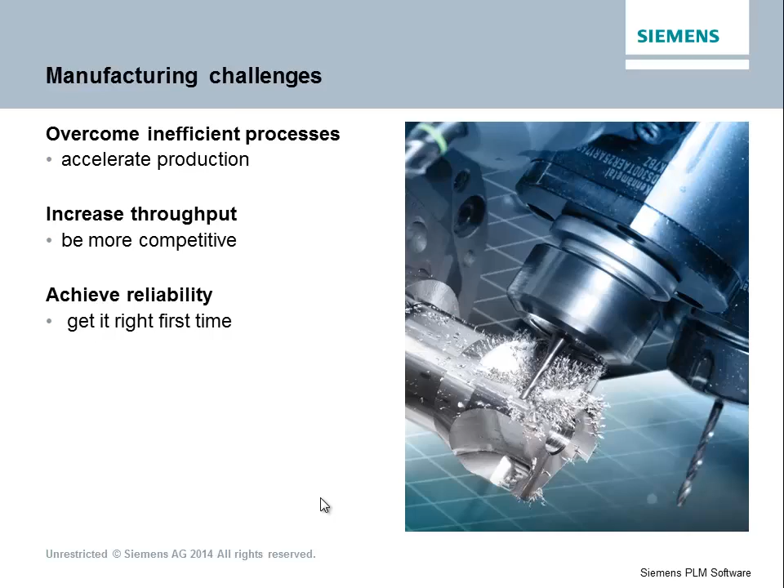The Siemens Advantages: a model-driven process that's maximizing the value of a unified system with innovative technology for greater productivity through automation, and having solution confidence to support your business with a proven system.

Now let's look at the model-driven process with NX. In NX, we call this the master model. Master model enables users to have a single model that's used for all downstream processes, from drafting, tool design, and assemblies to NC, CNC programming, and more.

Product manufacturing information, PMI, drives automation of the programming of inspection and documentation, along with CAM programming and feature recognition. Workflows are done in parallel and concurrently, thus reducing manufacturing engineering time. All users and consumers of this information are kept up to date, seeing the latest progress and changes in the work because of the full associativity in NX.

There is no need to manage multiple copies of design models or to use separate software for different work tasks. Engineering change orders are seamlessly handled. All documentation and programming is updated from the single driving master model. This factor alone saves time and money, eliminating issues like a part being programmed to the correct revision but rejected by inspection because their documentation was a revision behind.

Model preparation and job setup in NX. Here you can import or design your CAD model. NX reads all common CAD formats. We're going to select the CATIA V5 format. It's just a Windows file open, and here we'll see as we convert and load the part directly into NX, seeing the CATIA model. From here we're going to create a sketch plane and model the work holding and fixtures.

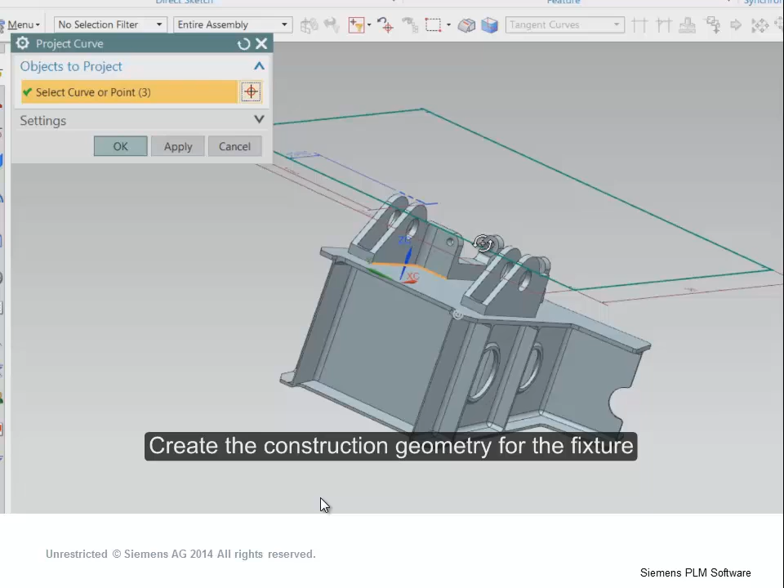We're creating the construction geometry that's used to build that fixture. We'll start with just a simple rectangle defining the outside border, or the footprint or pad, for the fixture. Again, with constraints and dimensions, you can size and shape the geometry as necessary. Here we're selecting the edges or features of the part that will be used to create the containment boundaries on the fixture.

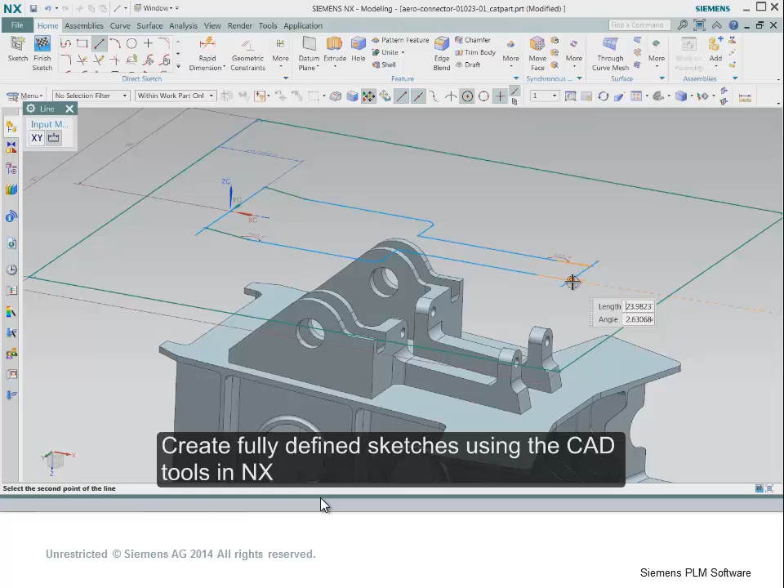This ensures that the fixture will always be associative to the part geometry. You can create fully defined sketches using the CAD tools in NX, as here we're adding additional geometry defining our design. You can create geometric rules that also assist in your design. Here we'll make all these lines parallel to the other sides of the fixture.

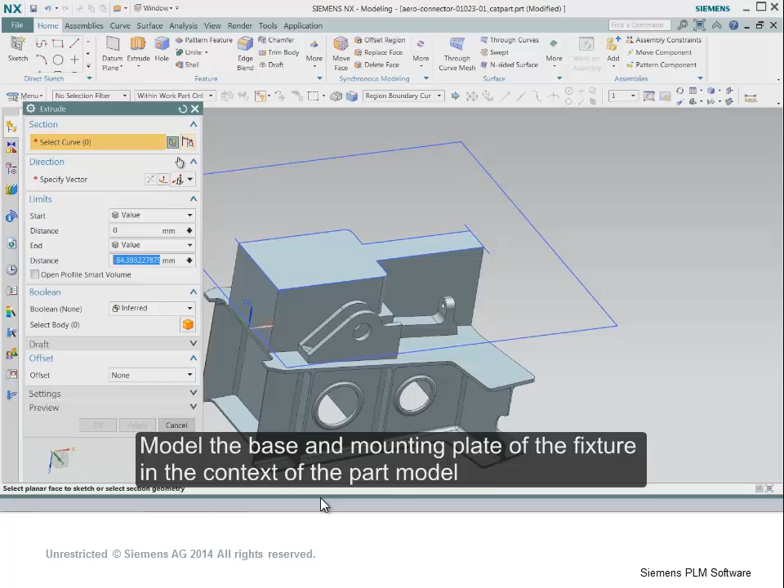Modeling the base and the mounting plate of the fixture is simple. It's just in the context of the part. We just select the part, and we'll select extrude, and we'll just pick a face onto the part. This would be the mating face where the fixture would align to the part. We'll then select the top area, creating the mounting plate for the part.

From here you could go ahead and add other fixture components to the part. Like here we'll add a bolt that would be used in our finished assembly fixture or our inspection fixture to do that. Again, you can add additional clamps and fixtures using assemblies and components.

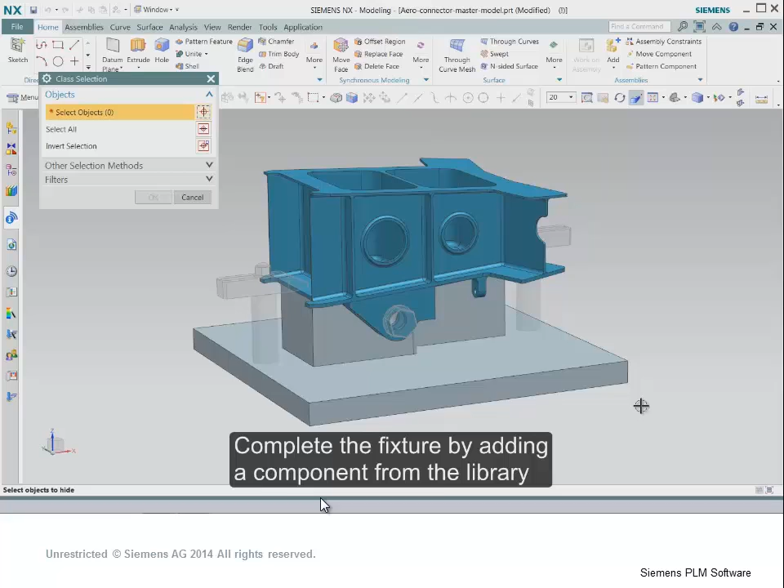So here we'll turn these off and continue on with our design using synchronous modeling to create the stock model for the manufacture of this part. Here we'll select the entire part and close all of the hole openings on the part.

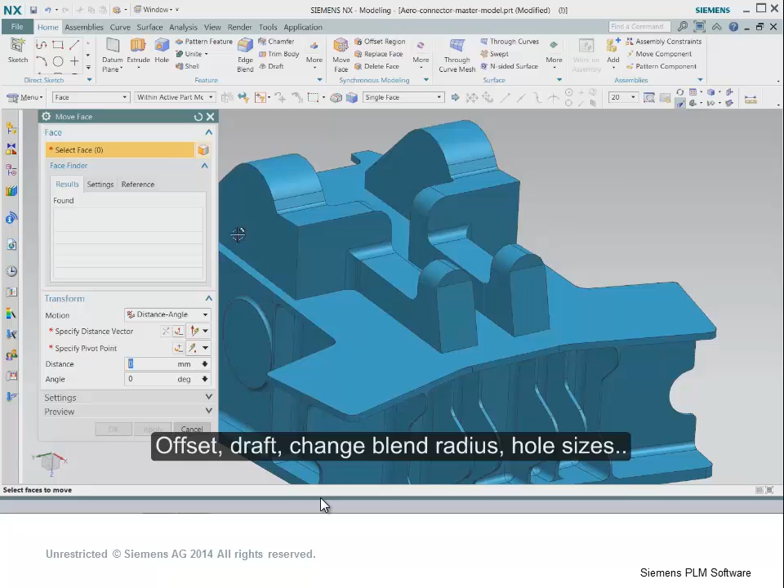We'll then offset different regions and boundaries of the part, representing what the casting stock would be from an investment cast part. Synchronous modeling can directly edit all the imported CAD model data. We'll add stock to the boss areas, change the blend radiuses on the part, remove some of the other features or de-feature the part, add draft angles, etc., and continue modeling the stock model of the part.

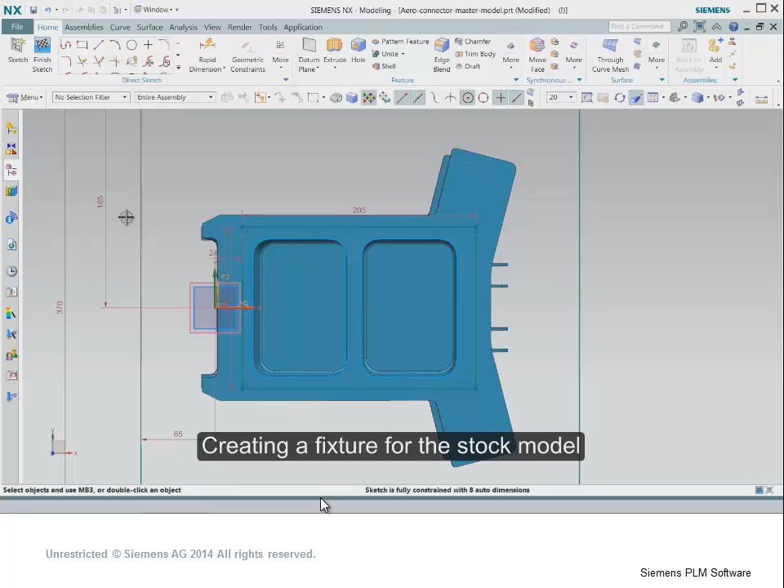Here we will continue modeling the second fixture for the part. Again, a similar operation as the first, we'll create our sketch for the part, defining the areas of the fixture we need to create. We'll select the edges of the geometry again to remain associative. There we select the geometry. You can see the ease of modeling inside of NX to create the fixture.

Here we will move some of the clamp components. You can again see the ease of the dynamic repositioning of components in NX.

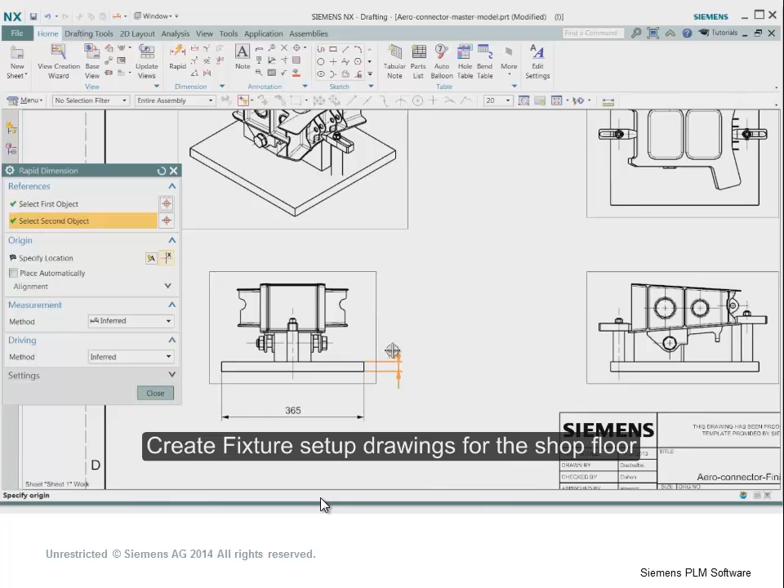From there we will create the fixture setup drawings for the shop floor. This becomes vitally important when jobs are created, to have this kind of documentation quickly, easily, and readily available associated to the part.

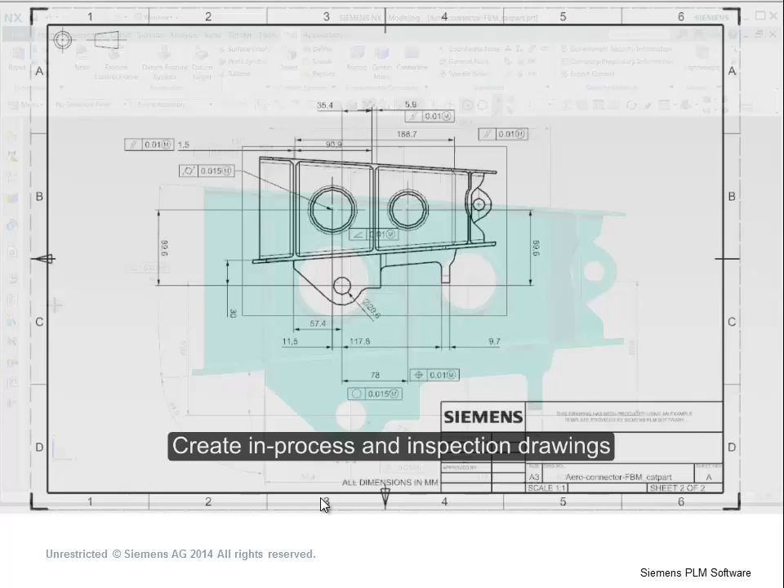Preparing product manufacturing information with PMI is easy, just by attaching the geometry the same as you would any sketches or dimensioning onto the part and creating the drawing, thus defining the product manufacturing information and feature control frames. Here we see the finished drawing being created for the inspection operations.

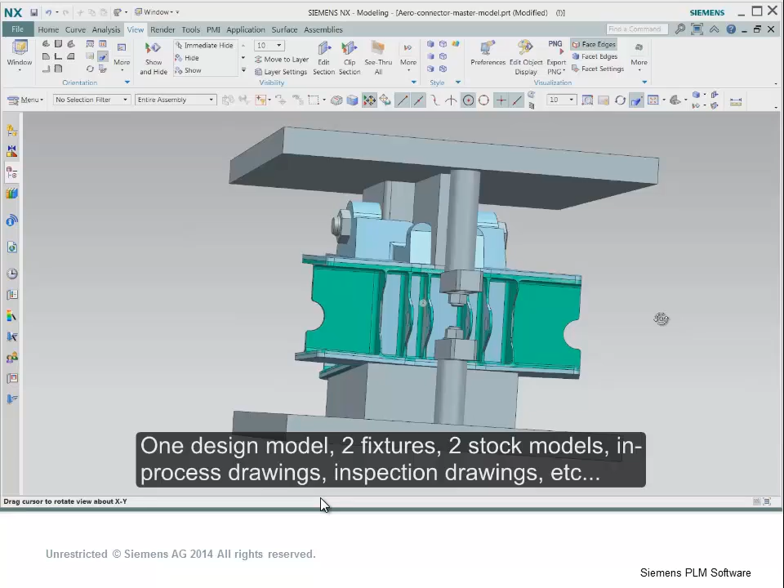There we move into, and you see a finished job preparation has been completed. One design model, two fixtures, two stock models, in-process drawings, inspection drawings, etc. Accelerate your production with NX.

We have just seen how NX is used to increase your manufacturing engineering throughput in the job setup and preparation tasks we all commonly use. Having the ability to create associative stage models and stock and casting models from customer-supplied design data ensures reliability and the confidence that you always have it right.

The inspection and quality department preparation and the fixture needs were handled, and the process documentation and drawings produced all concurrently from the one driving design source, enabling accuracy and communications throughout the entire job cycle. Let me tell you more about the master model workflow.

Let's move to the CAM and CMM programming tasks. Here the work that was done in the job prep and setup is used by the programmer and programming departments to apply the tool paths and our inspection paths. I'll show you this next.

Programming the setups and operations in NX.

Adding the part and the fixture to the CMM from our previous model preparation is fast and easy. Simply open the part and add it to the machine tool. Dynamically adjust the fixture components.

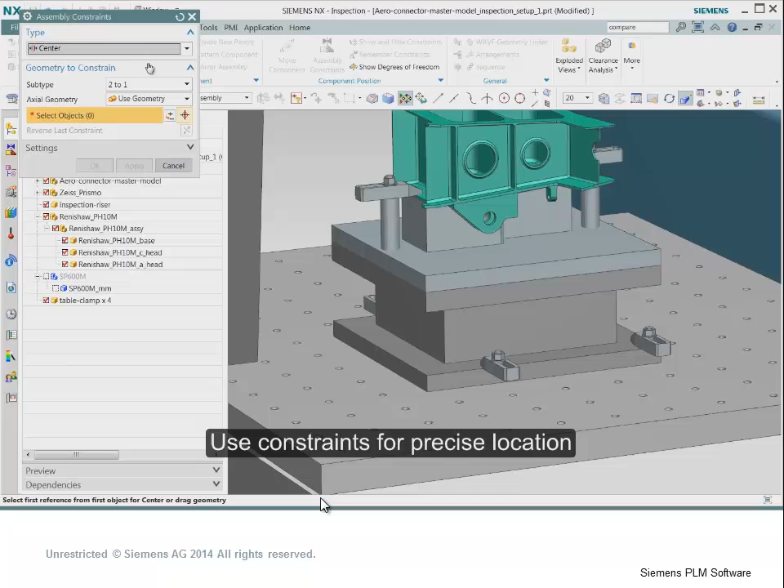Here we will align the clamp to the mounting holes on our CMM. You may use constraints to center this clamp on the table's hole position, just by selecting the edges of the clamp and a hole position.

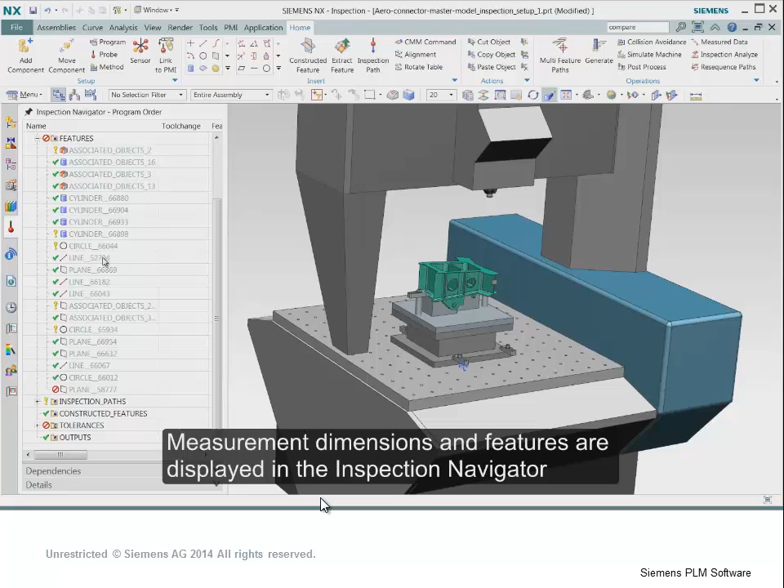Using PMI automation begins by linking the PMI on the model to the part. We select the SP600M probe and we automatically recognize the features, the measurement dimensions, and locations for the part. The inspection paths are also seen in the inspection navigator.

We verify the inspection paths of our part with simulation. To modify a path, we simply double-click to change any of the settings. Here we'll look at the point set and change them from 8 points to a 6x6 grid.

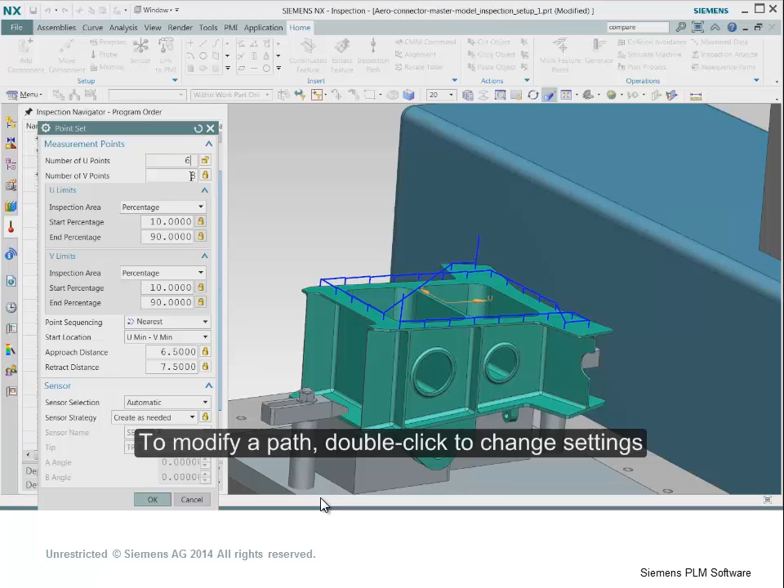Fast and easy programming in NX CMM.

Let's look at what the CNC programming department has been doing while we were over in inspection. First, set up programming the part and the fixture mounted to the machine. NX machine simulation verifies the programming and the material removal.

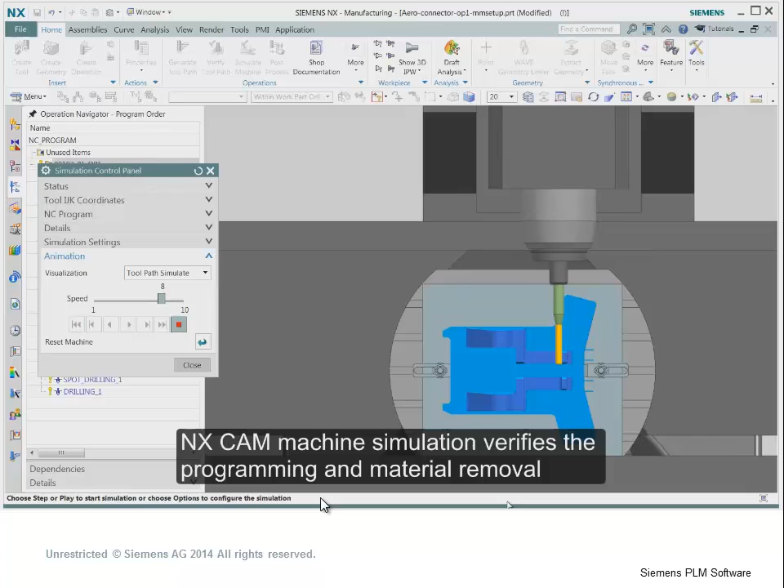Here we see NX simulation verifying our 2.5D volume-based milling.

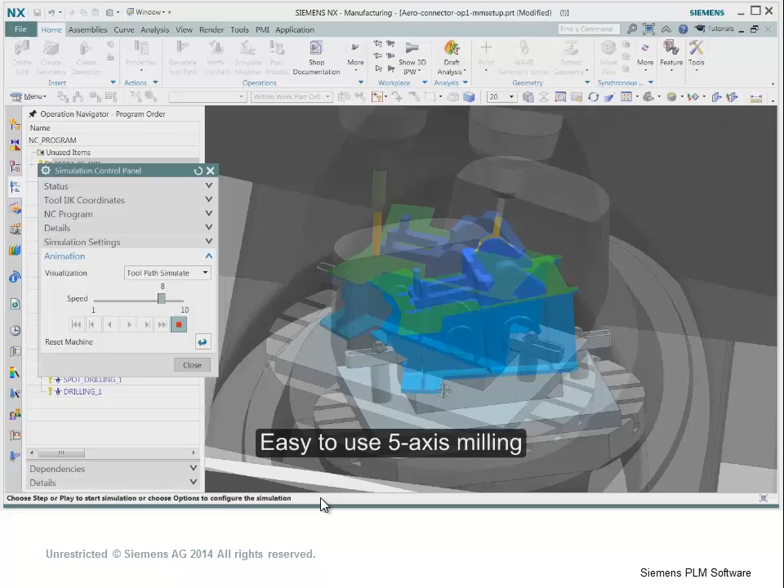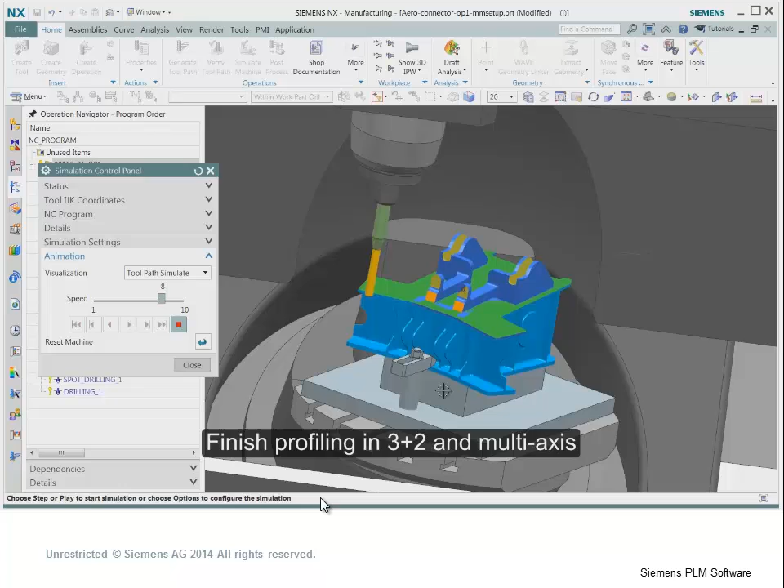We'll continue on with additional program features with easy-to-use 5-axis milling contouring around the bosses of our part. We then go in and look at swarf milling in 5-axis of the boss lugs on the part. We'll continue on with additional operations with 3+2 milling and multi-axis support by finish profiling the rest of our part contours, thus completing the first setup of this side of the part.

Additional hole milling is fast and efficient when programming inside of NX CAM.

Next, we'll look at the second setup, and the programming begins here with face milling in the second operation. Cut and rapid traverse across voids are all program options inside of NX CAM's toolpath.

Material removal and verification is standard in NX. Pocket floor cleanup and helical Z-level wall machining is shown here. We'll continue on with that boss, finishing the second boss, and then moving on again to finishing the holes in the second operation of our part.

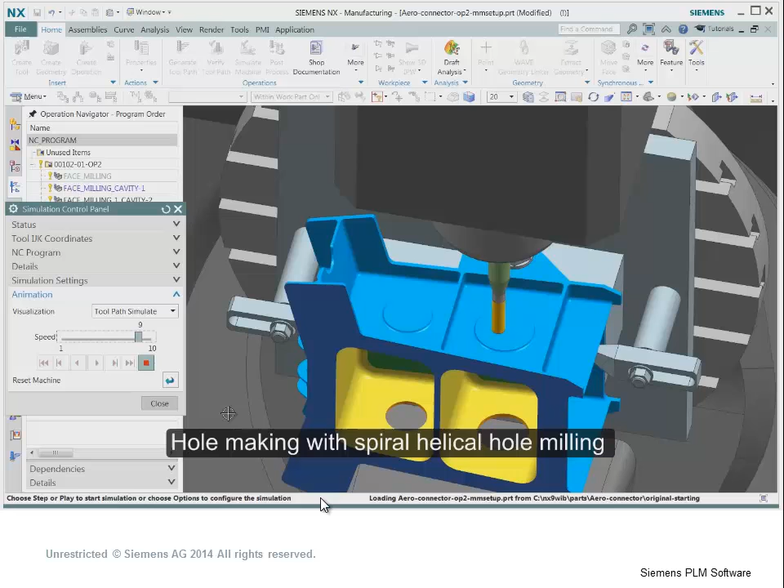Rotating and repositioning to do the second one with our spiral helical hole milling. Hole milling continues on the rest of our part, completing it until we do our outside contour with multi-axis contour profiling.

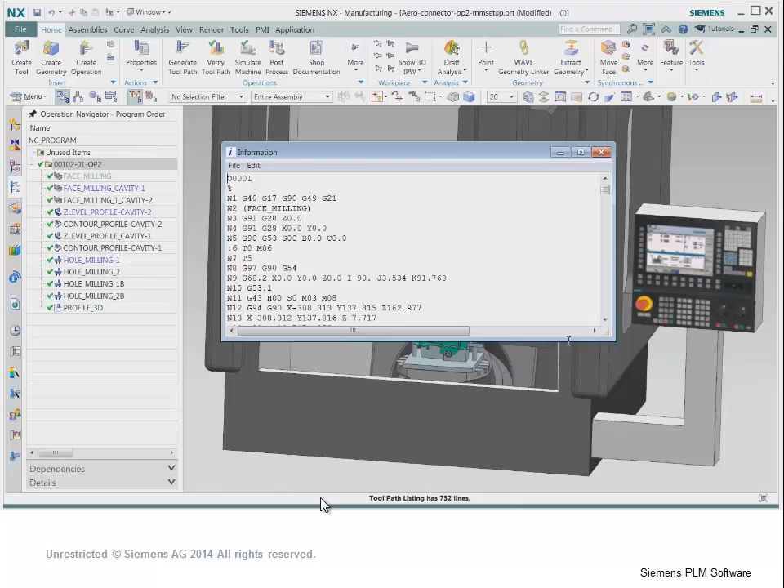Let's look at how post-processing is done in NX. Here we select the desired post-processor and the desired control format. Quickly and efficiently, NX creates the posted output.

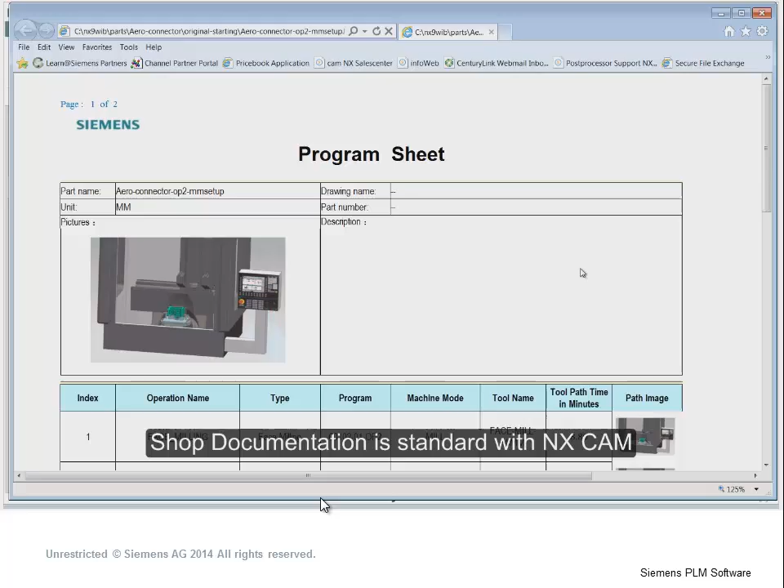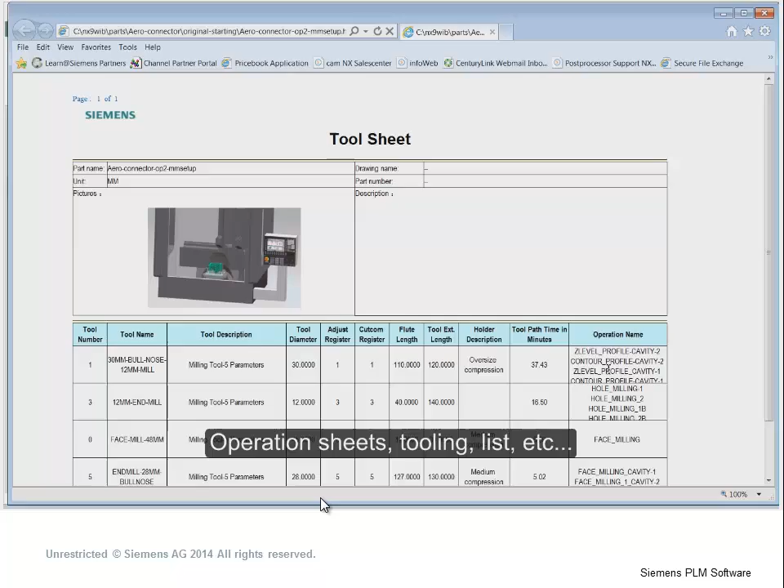Let's take a look at how this posted output would be used in shop documentation. Shop documentation is standard in NX CAM, and we create HTML formats of each operation and operations sheet. Tooling sheets and operations sheets are also used in shop documentation. Again, a simple click and pick creates this documentation in seconds. The job is now ready to go to the shop floor.

At this point, the work is ready to enter the shop floor production phase. We have just seen a completed manufacturing, engineering, and programming workflow process. We've seen how NX technology enables faster throughput with automation, intelligent features, and streamlined interface. All along the way, we use the resources of tooling, fixture, machining, post-processor, and simulation libraries in NX.

It is with this capability that NX captures and reuses your manufacturing knowledge and practices to drive your production with consistency of output and reliability that's right the first time. Here we'll use NX to simulate what will occur on the shop floor in this demonstration.

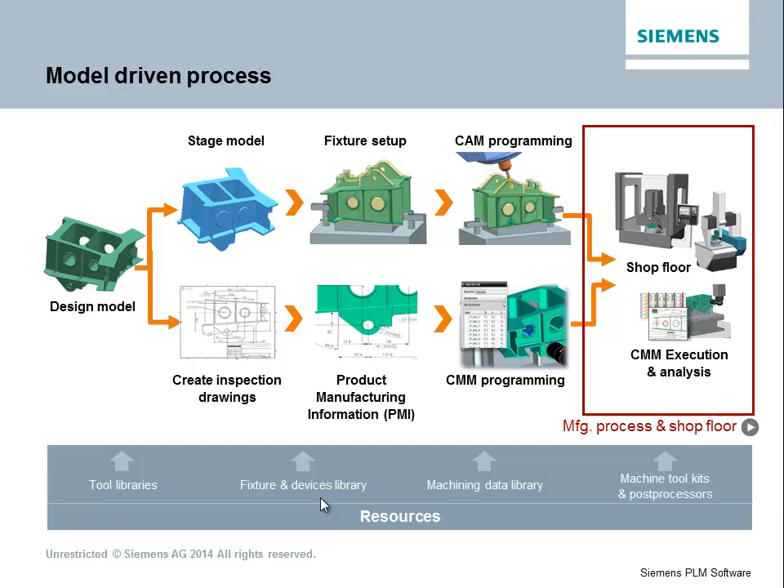The part has been machined. Now it's time for the first article inspection process to begin. Let's look at what the CMM programmer had completed while we were in the CNC department. You can see the inspection paths now have been selected and are completed. Any modifications made, we'll now go back and simulate what is happening on the shop floor inside of NX CMM.

So here we'll see the inspection paths come down, do the locations for our holes on the side of our part, and then we'll be probing our rib and pocket locations. Again, you can see safe repositioning of the probe to measure the rib locations and thickness.

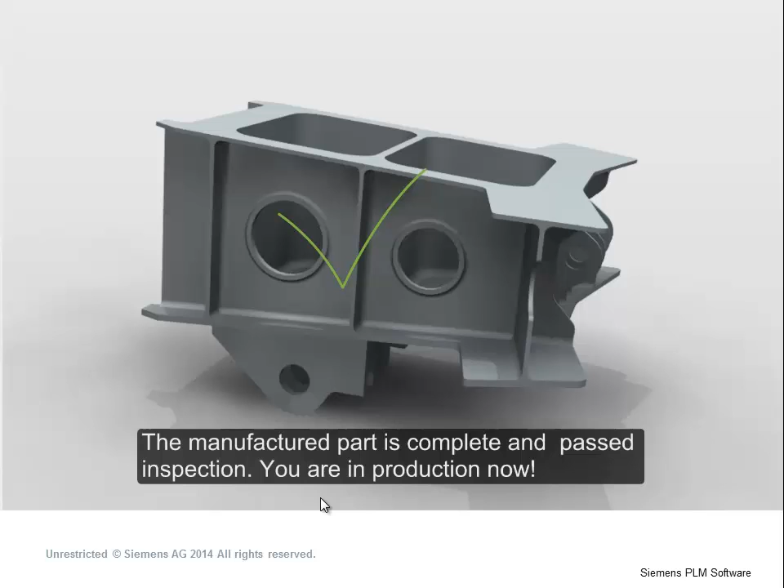The manufactured part is now complete. It passed inspection. You're in production now. All completed manufacturing cycles were done using NX.

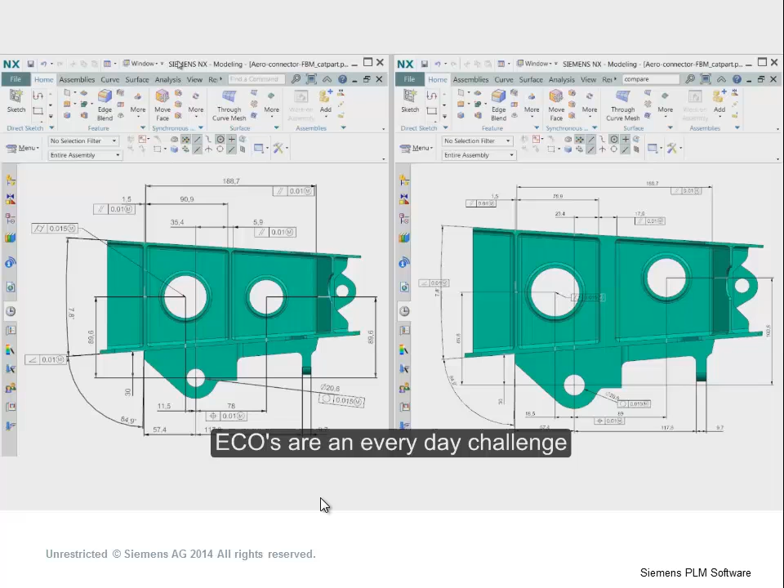But wait, engineering change order. How much time and effort will it cost you? Will there be time to redo all the engineering and programming on the first article production? ECOs with NX are an everyday challenge.

It's simple, it's fast. We'll take a look at what has changed. We'll look at the hole locations, the rib locations, thickness, and corner blends, all have changed. NX maintains the associativity of these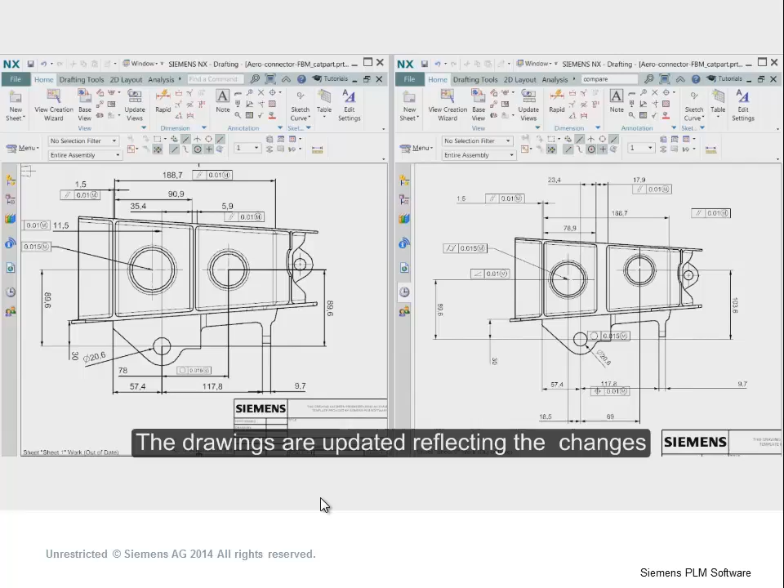updates and has updated all the documentation, drawings, and inspection drawings. The drawings you see have reflected all of these changes. Next, we'll review the impact the ECO has on the CNC programs.

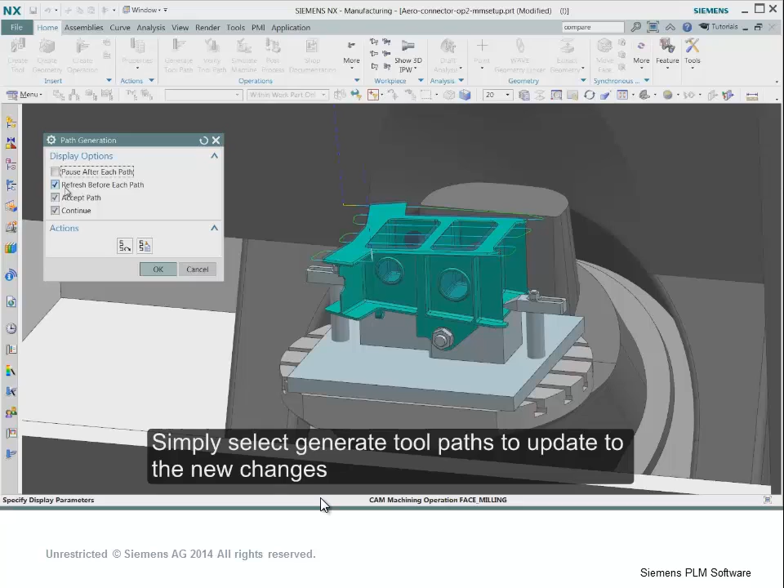As you can see, we opened the part and the part files in the Navigator have been marked invalid. They need to be updated. Changes to the toolpath were marked. We select Generate, and the new processes are simply updated and used for your verification, with simulation to approve their changes.

We'll continue looking at all these changes that are going on with our part. Next, the user will select and view the toolpaths of each single operation he would like to review.

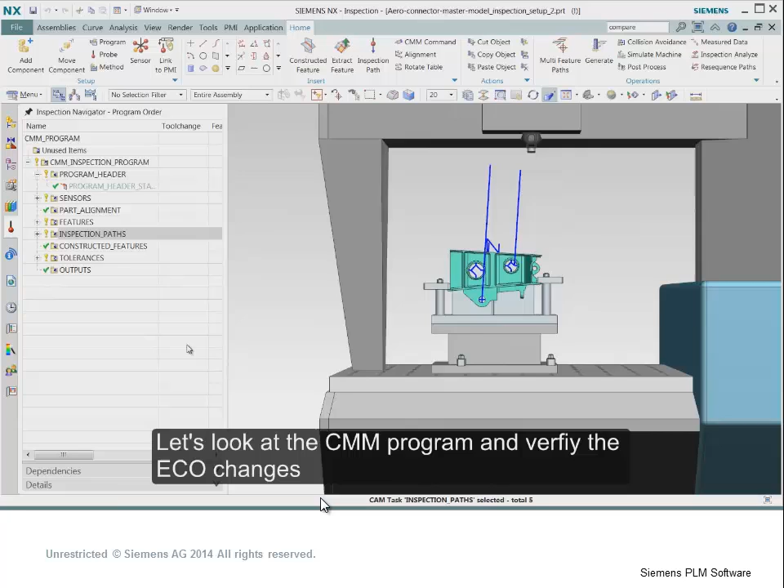We'll now look at what happened to the CMM program and verify those ECO changes. Again, we see the model has changed and the inspection paths. Again, we go back, use simulation to verify that, to have the confidence in knowing it was right the first time. Again, we will go back.

You'll see the pocket and the rib locations have moved along with the thickness. Fast, efficient ECO handling with NX Manufacturing Solutions.

The Siemens Advantages. We just have seen the advantages of the model-driven process and how NX can decrease your time spent in manufacturing, engineering, and programming departments, bringing consistency and confidence to your manufacturing workflow and processes. Next, we'll look at NX-CAM's innovative technology in toolpath and job programming. We will see how productivity is increased through NX automation.

Innovative technology. The toolpath is created with optimum tooling and cutting strategies to reduce programming time by eliminating lengthy geometry selection and preparations necessary in many CAM systems. Productivity is increased with intelligent toolpath generation by NX-CAM's knowledge-driven tools.

NX-CAM's 2.5D volume milling saves programming time with built-in intelligence, resulting in not only programming time reductions, but time-saving material removal, all while keeping it up to date with the master model to give you even more time-saving power when ECO changes try and slow you down. Let me show you how.

Let's take a look at an industry example of the company Telsmith. They're involved in the industrial machinery and heavy equipment marketplace. Their business challenges were to increase their CNC programming output and improve NC machine productivity.

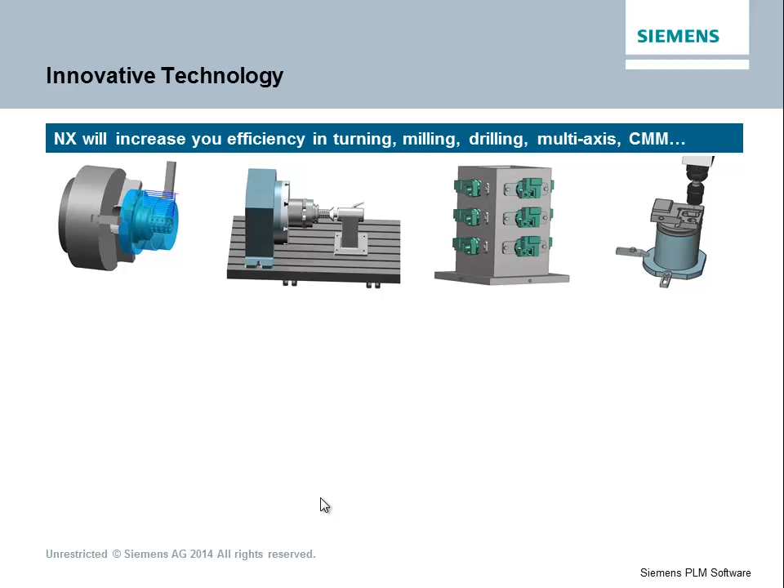NX innovative technology can increase your efficiency in turning, milling, drilling, multi-axis, CMM, documentation, and more. Many products need to be manufactured with multiple setups across multiple machine styles. We've seen how Master Model ensures that we have the correct data all the time. Now let me show you in more detail how NX-CAM can drive productivity and time savings in your business.

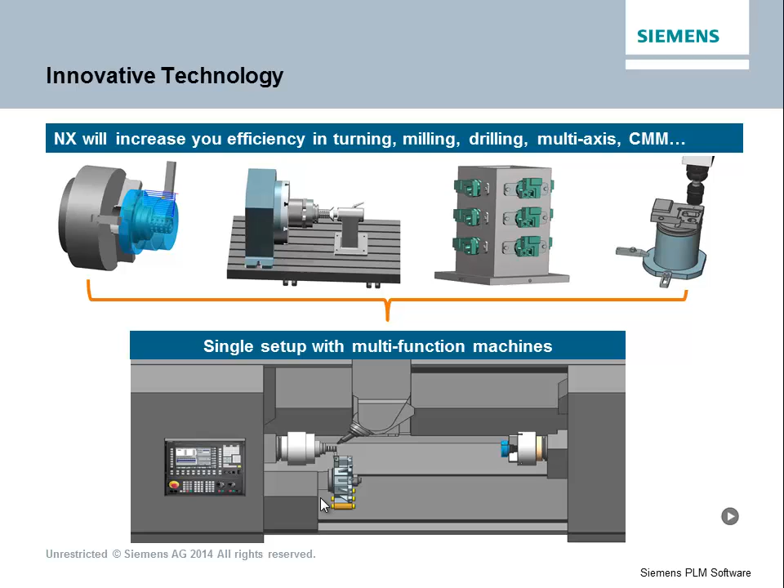Complete programming of a machinery part will be demonstrated here. We'll take a look at this filter head part.

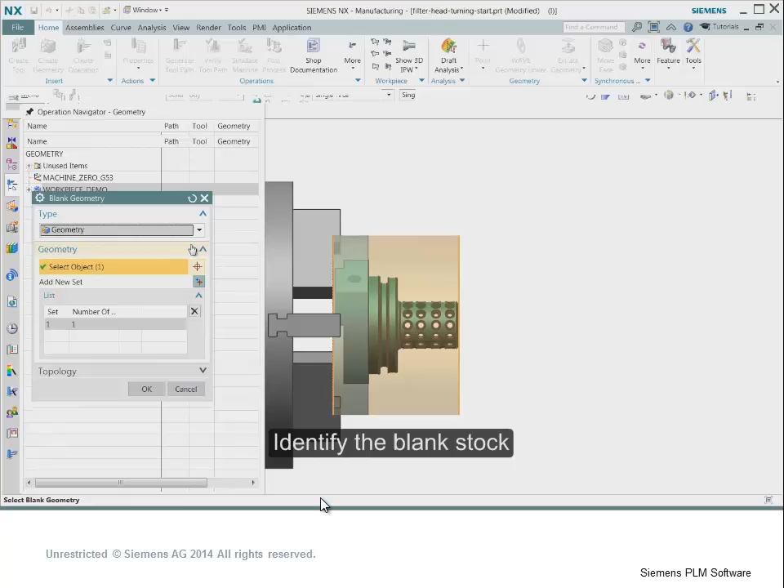We will start with the turning setup in NX-CAM. Notice we have a workpiece setup. We define our workpiece, our stock, blank, and fixture components. Along with that, we will identify the blank, and we will select the material from the material library that this part will be manufactured from.

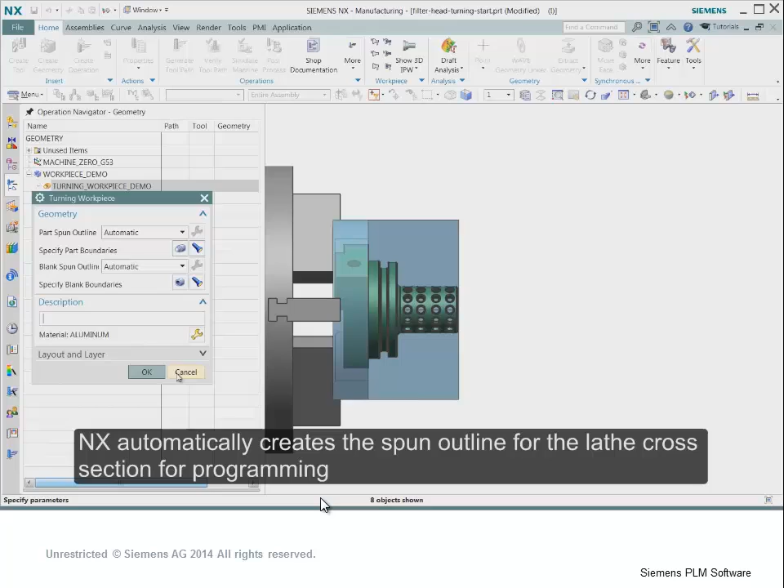Here we'll select aluminum for our part. From there, we will go back. NX automatically creates the spun outline for the lathe cross sections used for programming. There we can see them outlined for us.

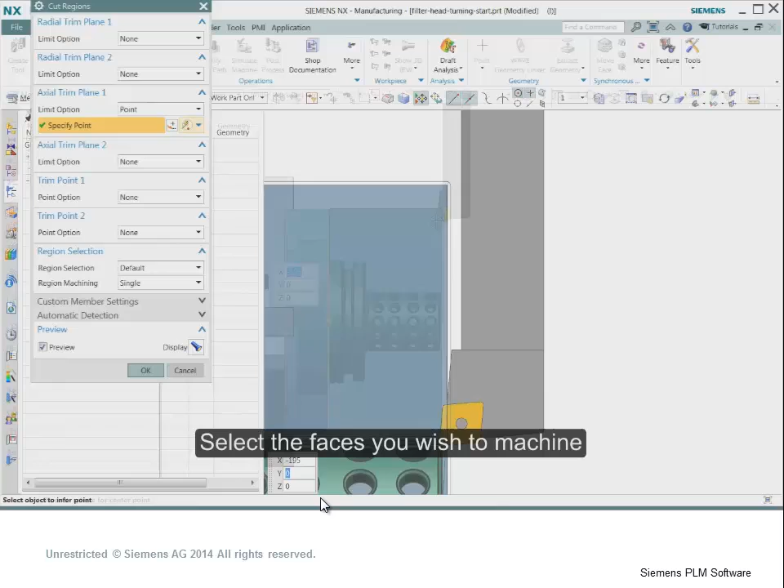Next, we'll look at how to create toolpath operations in NX. Here we'll use the facing operation for our part. We'll select our part, and it's as simple as selecting the cut region or cut face we wish to use. We can grab the tool, dynamically zoom in, take a look, and simply press Generate. At that point, we understand the volume and size of the stock. We've created the facing operation.

We'll create our second operation for roughing. Simply press generate, and we understand where the stock volumes are, no additional picking necessary. Here we'll see 3D material removal and toolpath verification of the two toolpaths we have just programmed.

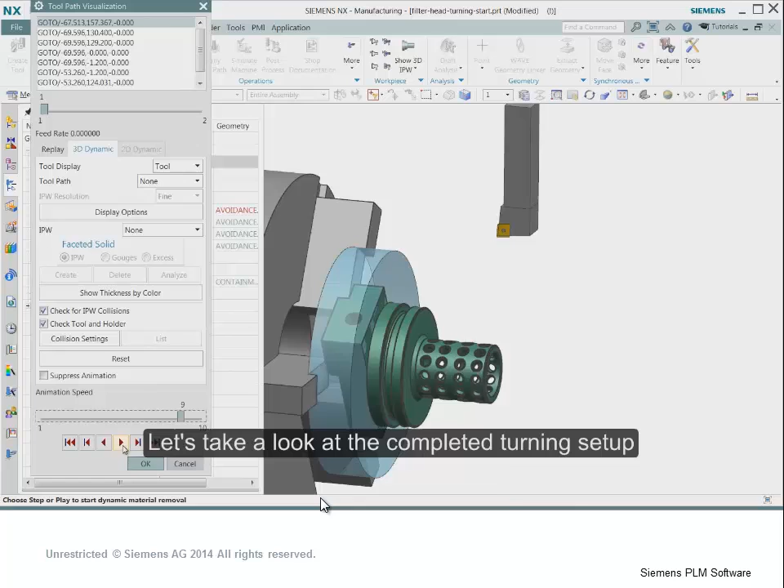We will continue programming our part with the rest of our features: grooving, finish operations, etc. Let's take a look at what the programmer has done. We'll replay this again with verification and material removal. We see our facing operation, our OD operations, followed by our finish pass and grooving cycles to complete our part, along with the boring or drilling of the large hole in the center of the part.

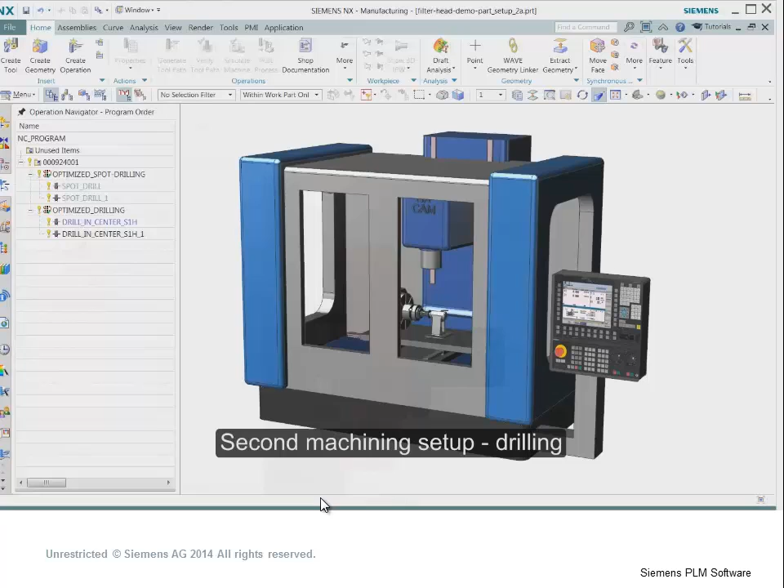Second machine setup is drilling, if this part was done in a conventional manner across three different machine tools. NX setup assures reliability with machining through the use of assemblies. Here we use feature-based machining to automatically program the holes of the part.

With feature-based machining, we simply select the part and select the desired type of features we are looking for. You may filter them separately or find all features on the part. Here we will unselect grooves and just select the hole operations on the part for this demonstration.

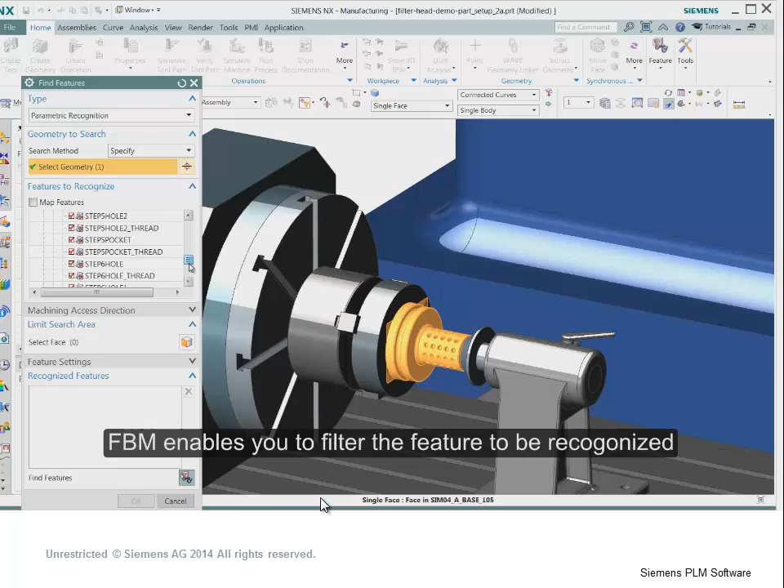It's simple: we select the option for holes and ask it to find the holes. We see NX finding the features, locating them, and there we see that we have found over 60 hole features in our part.

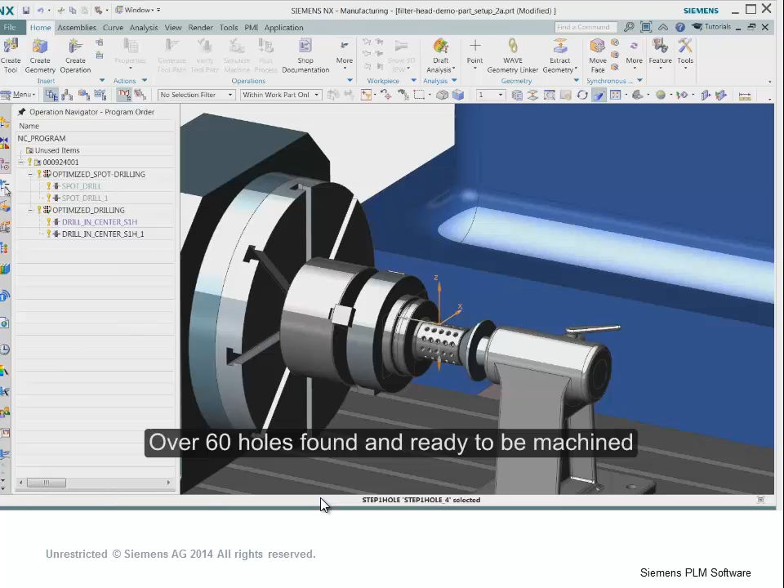It is quick and easy to just select these features to have them automatically programmed with the appropriate tool size and operations for that feature type. Here we would have our drilling operations, our spot drill operations, center drill, chamfering, and our tapping operations.

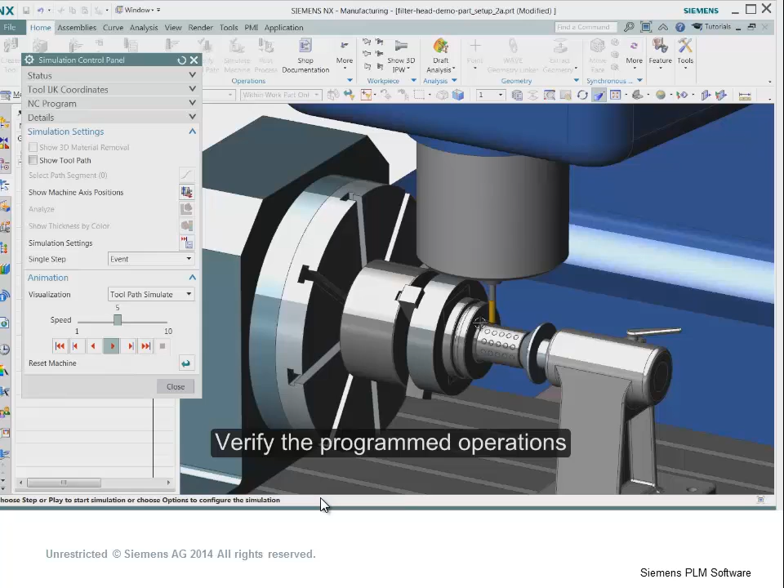Let's take a look at the verification of these program operations. We'll simulate the part, zoom in, and see where our first hole location will be. Then we'll select play to watch our program operations be simulated as they would be machined on the actual machine tool.

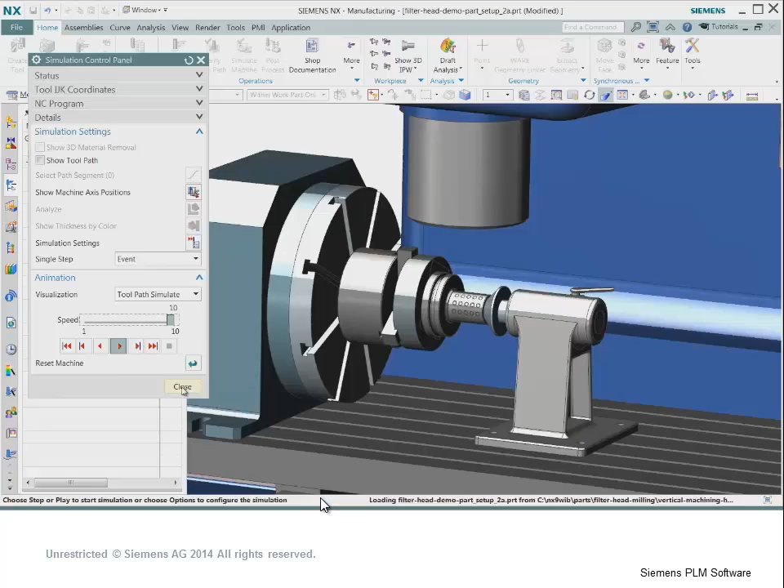We'll continue from spotting and on to finish drilling in our operation, thus completing the second setup for this part. We will continue moving into our third setup, which involves the finish machining operations on the head of the part. Here we're using horizontal machining with our multi-part programming.

2.5D volume-based milling keeps track of all the in-process stock across multiple machine parts. With NX, it's only necessary to machine or program one part, and all the other parts, regardless of orientation, are simultaneously or automatically machined.

To make a change, it is quick and easy — just select the operation, double-click, and make the selected changes. Multi-part programming is standard in NX CAM.

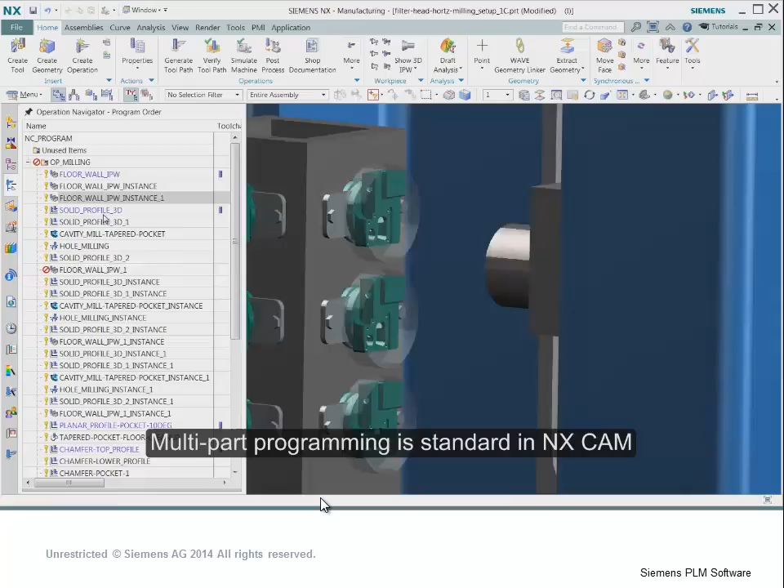This completes our standard machining operations of turning, drilling, and milling. Multifunction machines reduce setups and increase productivity. Multifunction programming requires only one setup in NX CAM.

Here we see synchronized toolpath on the main spindle for turning the main body of our part. We continue on with the boring of our part, finish toolpath, and grooving operations.

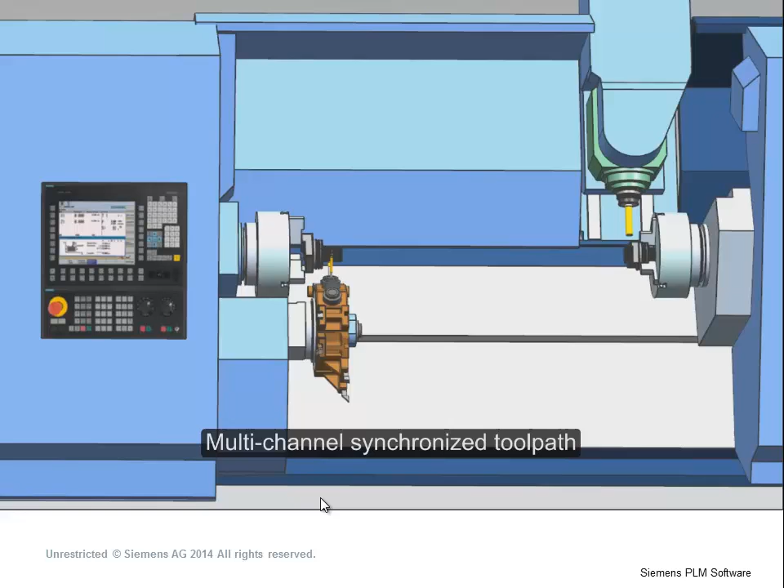We continue by drilling on the main spindle and milling operations on the sub-spindle, continually programming on the end of our part, creating the part contours, relief areas, and holes on the head of the part, while still drilling 60 holes on the main spindle, thus saving valuable program and machine time across multiple machines.

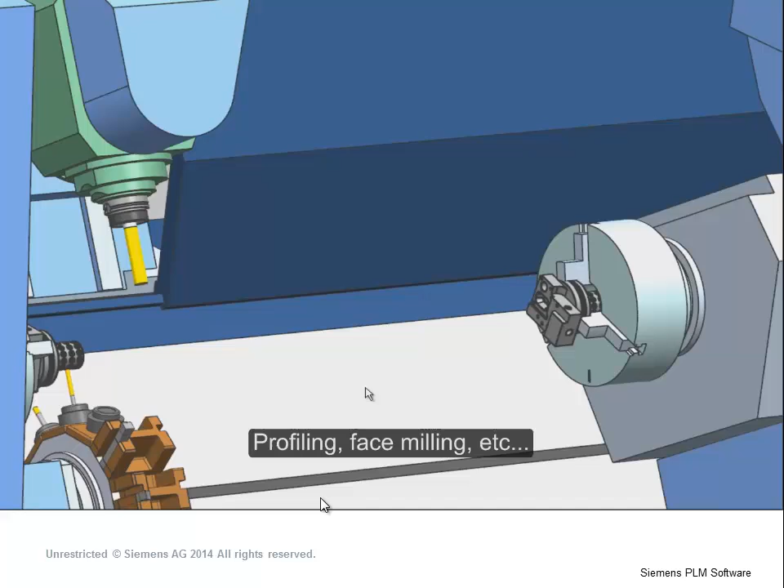Here again we can see the toolpath verification, some chamfer milling operations going on. Now we'll finish the face milling on our part, moving on to do some 5-axis machining inside of the small cavity on the top of our part, all while still drilling our 60 holes.

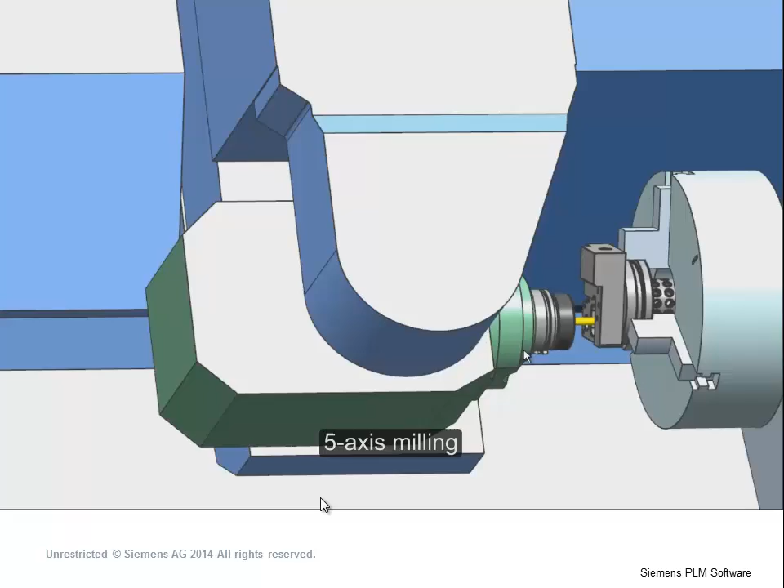5-axis milling again is simple and easy in NX CAM. Here we'll see our contour and contour profiling operations in that tapered wall cavity. There we have it, a 5-axis mill turn part, all completed inside of NX CAM multifunction machining.

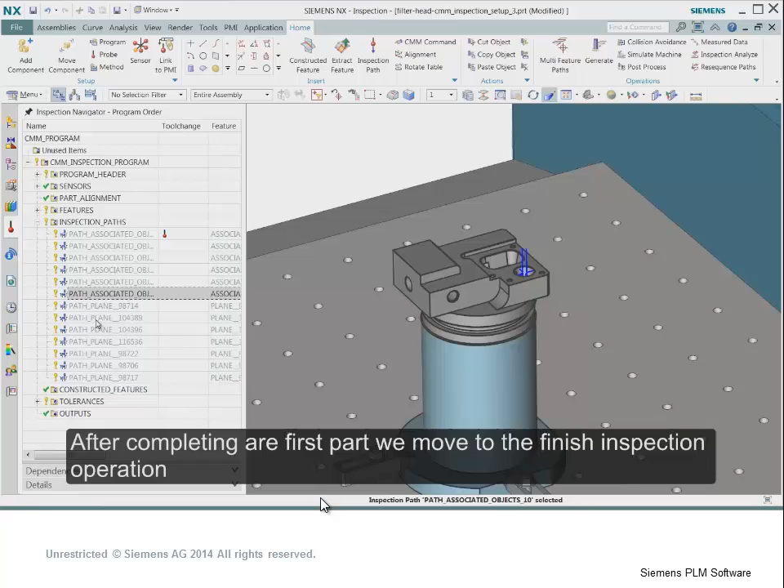After completing the first part, we move to the finish inspection operation as we had seen before in our aerospace style part. So we see all of our inspection paths that we had selected, utilizing the same features of linking our PMI programming on the part.

The CMM programmer may make some desired changes as we've seen before, changing the size or number of points or contact points that are used. The easy-to-use interface allows quick, rapid changes inside of NX CMM.

All with the power of NX, milling, drilling, turning operations. Whether standalone machines or multifunction, they are all done fast, efficient, and easily with NX CAM.

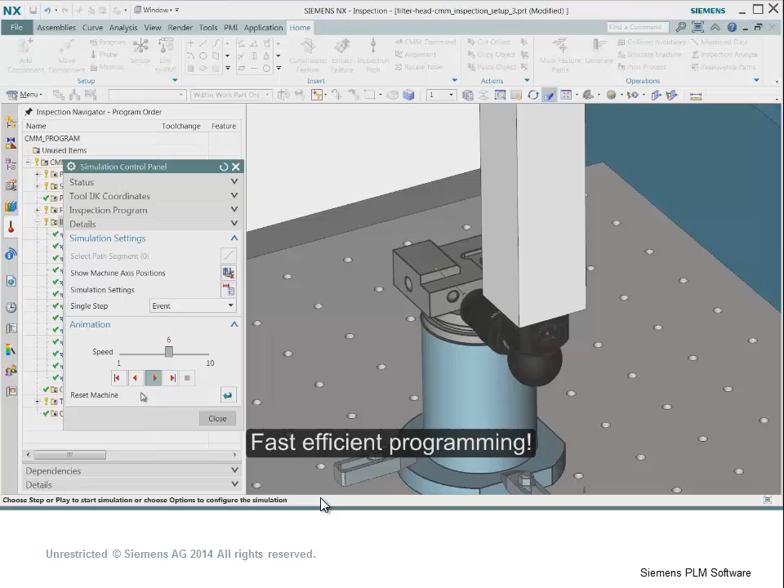The Siemens Advantages: solution confidence. We have seen master model, NX CAM, NX CMM, shop floor documentation, and all in a concurrent workflow, showing how innovative NX technology can enable your business to grow and be more competitive.

Let me show you more detail on how Siemens manufacturing solutions are affordable, right-sized solutions for your business.

There are three major components that contribute to the manufacturing reliability and the confidence that you get it right the first time. They are an integrated associative manufacturing environment that brings it all together, from CAD, CAM, CMM, all the way to the shop floor, and having scalable solutions to match your business needs at affordable costs.

Let us show you how affordable an NX solution is. You can start with a value price package or a point solution for turning, milling, etc., and always have the confidence that you can add capabilities as you grow and your needs change, all the way to fully managed manufacturing, shop floor, and simulation environments, along with the staying power of a major manufacturer, Siemens, an established vendor in the manufacturing marketplace.

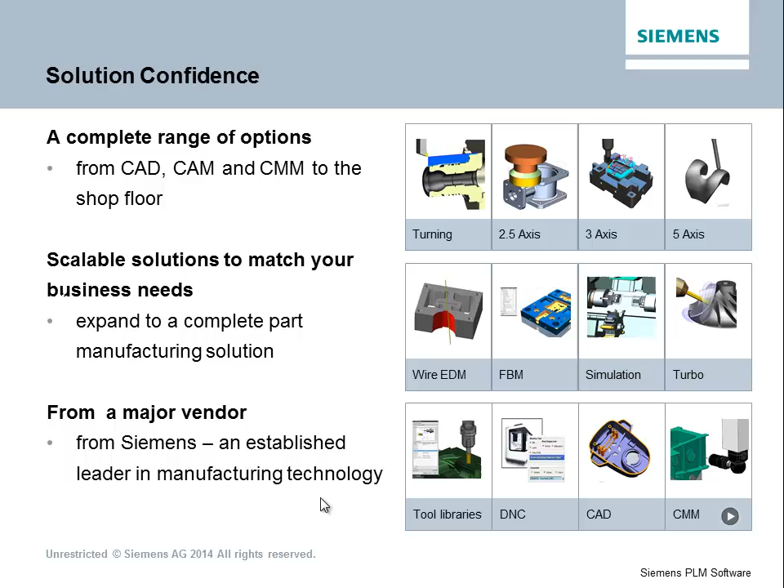Let's look at an example of a larger company that has used all of the Siemens products. Fooke leverages an end-to-end product development solution from Siemens PLM to streamline the development of large complex machines. Their solutions include NX, NX CAM, Teamcenter, and the Siemens 840D controller.

Whether your company is small, medium, or a worldwide manufacturer, Siemens Manufacturing Solutions is right-sized for your business and your future. Let's watch and listen to what one of our mold and tool companies has to say about their success with NX.

Menco Tool & Mold's primary business is building plastic injection molds. We've been in business for over 50 years. Our competition isn't the company down the street. Our competition is the world marketplace.

We were an early entrant into CAD/CAM, where we found a niche in the marketplace, whether it be general machining or the mold making part of our business. It is complex shapes. We always strive for the quality of the tool that we take to press.

We use NX to maintain that quality. A customer comes in with a concept sketch that he wants to manufacture, that he wants us to mold. We're able to take that napkin sketch and turn it into real product using NX.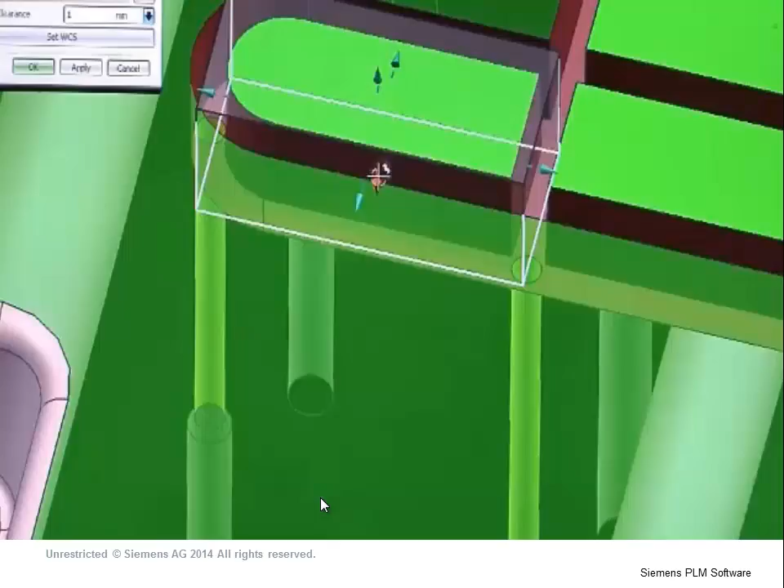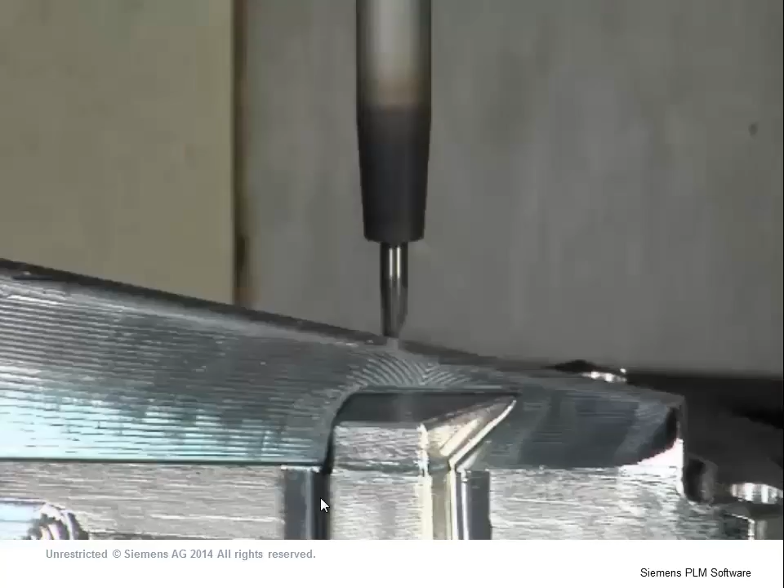NX gives us the tools to engineer our designs up front, whether it be a product design or a tool design. We want to make sure that we go through all aspects of the part and the tool early on in the process. By doing that, we know that when we start cutting chips, we're actually cutting what we want. We're not duplicating efforts.

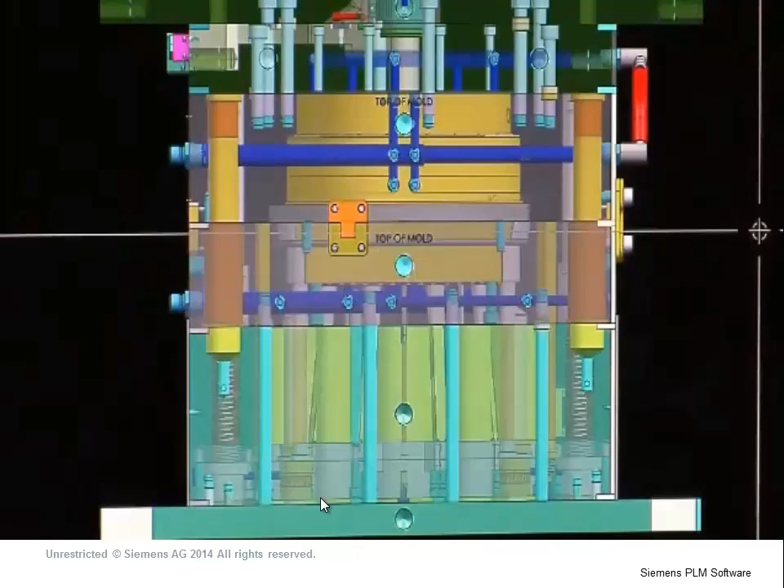So it's important for us to maintain that accuracy through the entire process, and that's what NX gives us. We get a supply file from a customer and we'll take it in here and we'll redraft it and make it toolable. Basically, I will wrap steel around that part and make the mold base that will produce the plastic part. NX is a strong modeler where we can bring in data from multiple sources.

The ability to manipulate complex geometry is easier to do inside of NX because of its ability to deal with explicit models, hybrid models, or fully featured models. We're not limited by the software in order to develop our product.

Synchronous technology helps in the way you can manipulate geometry easily. You can go in there and remove faces, delete faces, simplify bodies quickly. You don't have to worry about parameters. You just go in there and delete or change size.

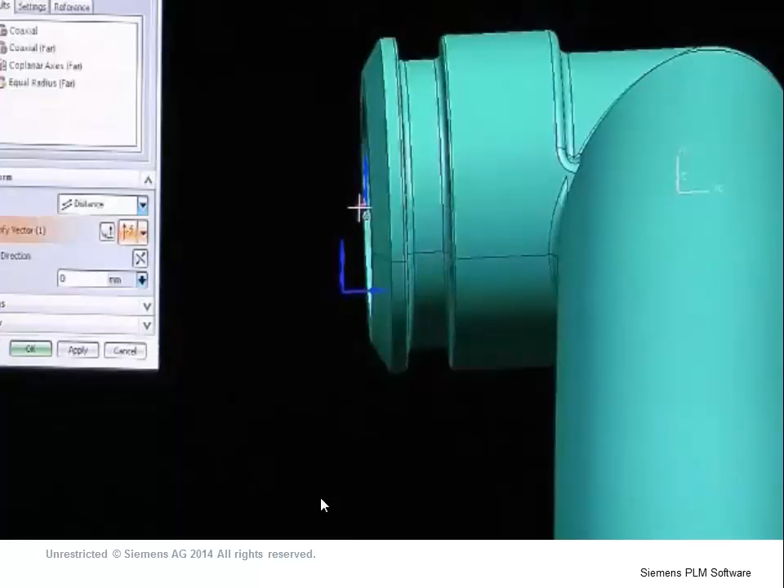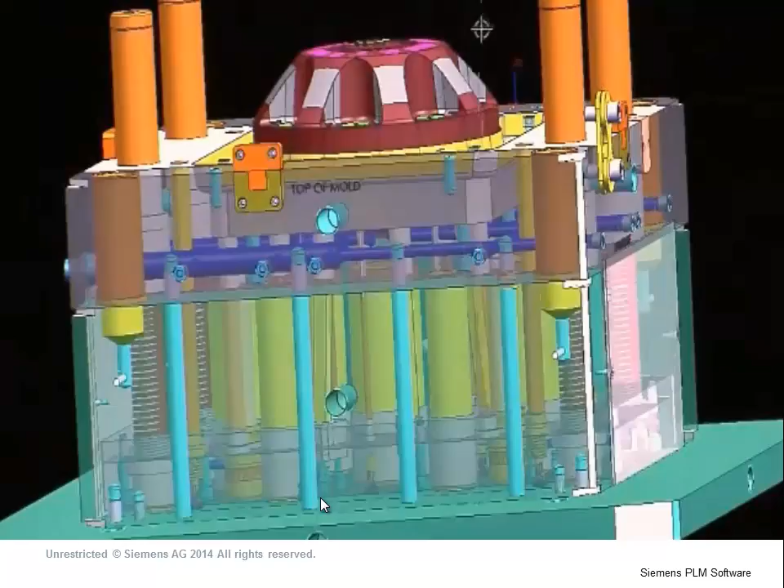That is a Mold Wizard component. We dropped that in. It automatically knew to hook into the ejector plates down here. All we did was put the part area on it by wave-linking in the part geometry into the lifter file and then trimming it off. And if we ever update that part, that lifter will update automatically.

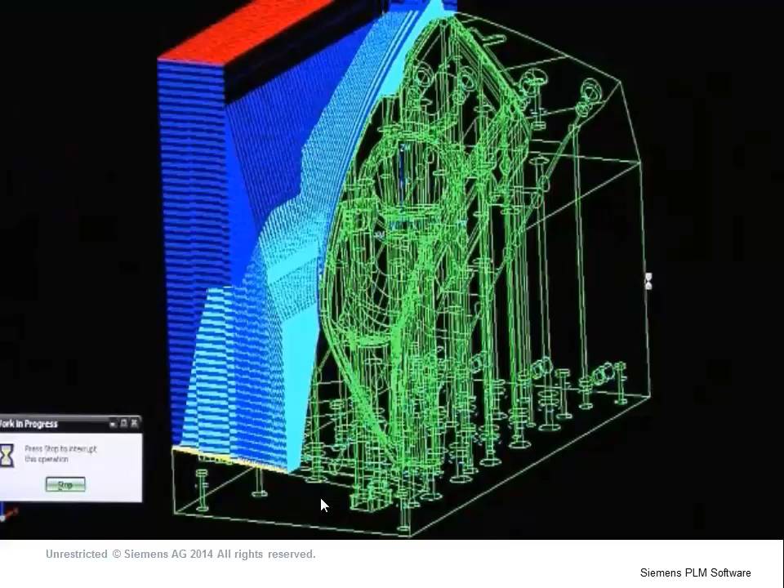We allow that master model to propagate through the tool design into programming, where tool design will go in, update their model. Programming then will go in and update their data, their tool paths over top of the existing tool data. That's going to ensure that we keep accuracy through the entire assembly, knowing that the finished product we get out of the mold will in fact be what the customer initially sent.

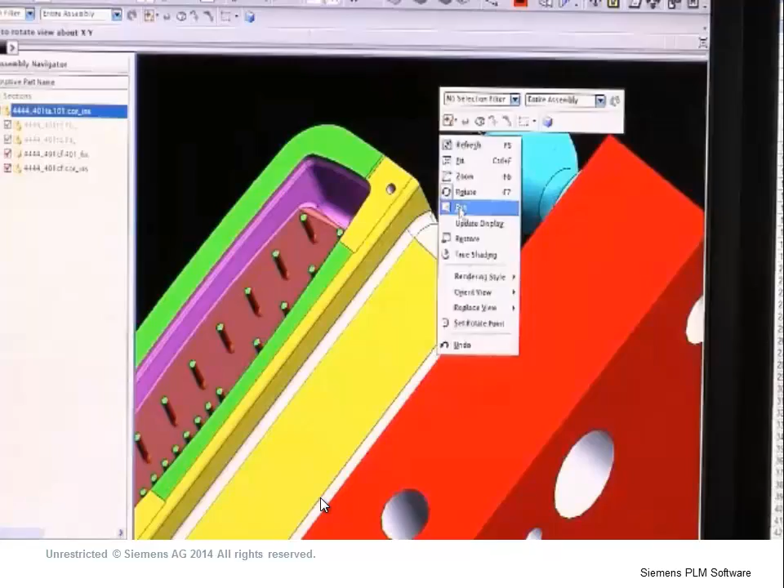We program 100% of the model using the CAM software from NX, and then we do all our electrode modeling, everything through NX, so the finished product... The master model is very important because if everybody's on the same part at the same time using the same model, everybody's looking at the same thing all the time.

Everybody knows how to dimension, verify stuff. You don't have to teach 3 or 4 different softwares. So if everybody's synchronized on the same software, everybody can help each other.

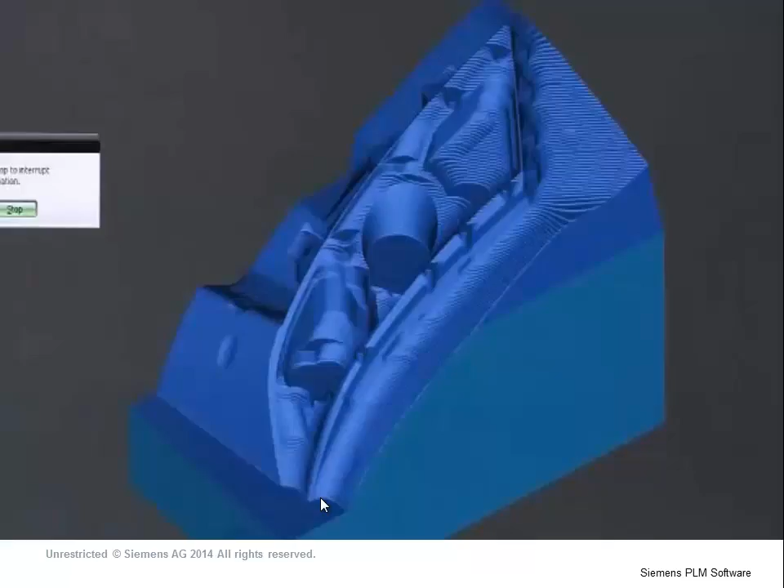You've got to save time, you've got to save money, so we implement high-speed machining whenever possible, small cuts, light cuts at fast feed rates. NX has several options that let you adjust your paths accordingly.

There are options in NX that'll actually round the corners, which creates a much nicer and smoother path. It doesn't have the jerkiness of the machine. It's faster, it's better quality. Now you just set it up and away you go.

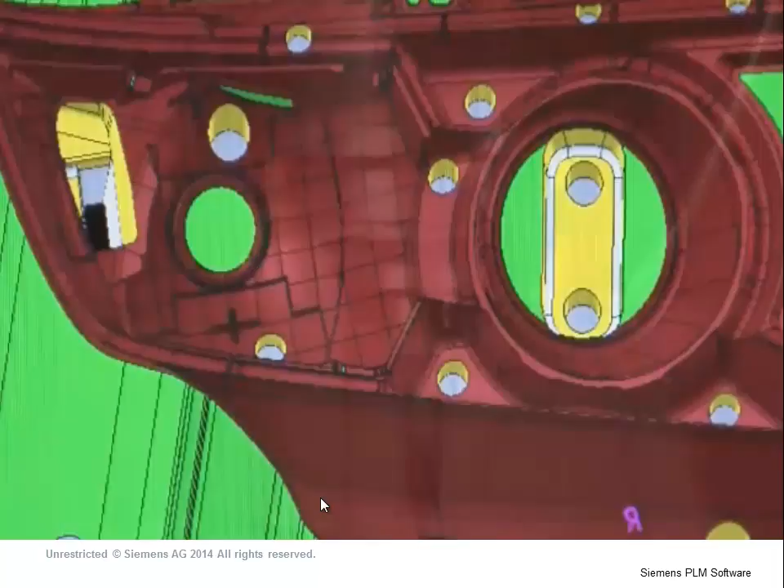Sometimes you may have 12, 14 inches, and now we can cut that in half, which means better rigidity, better part finish, better tool life. Sometimes I'll run 20, 24 hours for a finish cut that requires no polish. And you have to have a very good software to do that.

We start the product with NX, we design in NX, we program in NX. So what you see is what you got. I mean, it's that accurate, it's that good. And without it, we wouldn't be in business.

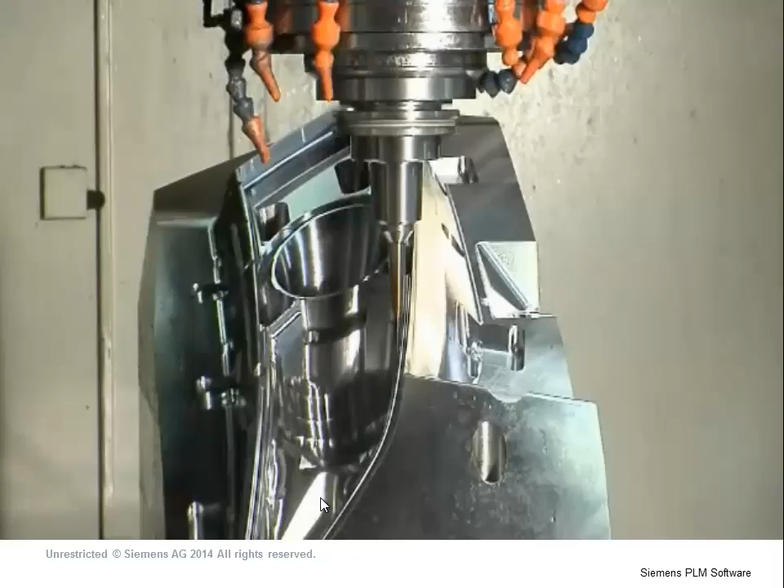I mean, it's pure and simple. If you're not cutting fast, you're not making money. If you really want to cut a true part form and cut it accurately, you better have it all today, because the pricing isn't there anymore. It's a world market. It's serious business.

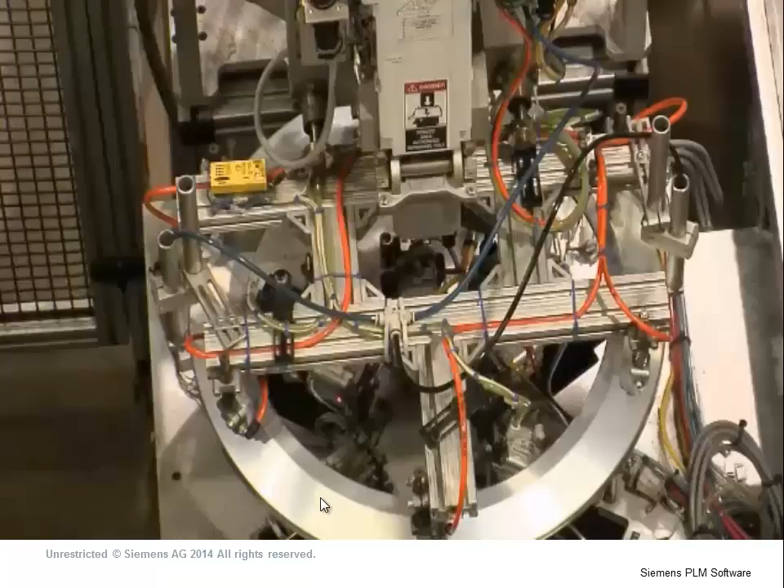NX is an important product to us because it is an integrated product, and that's what we're about. We don't just design the part, we manufacture the part. So it's important to us to take it all the way through in the same software.

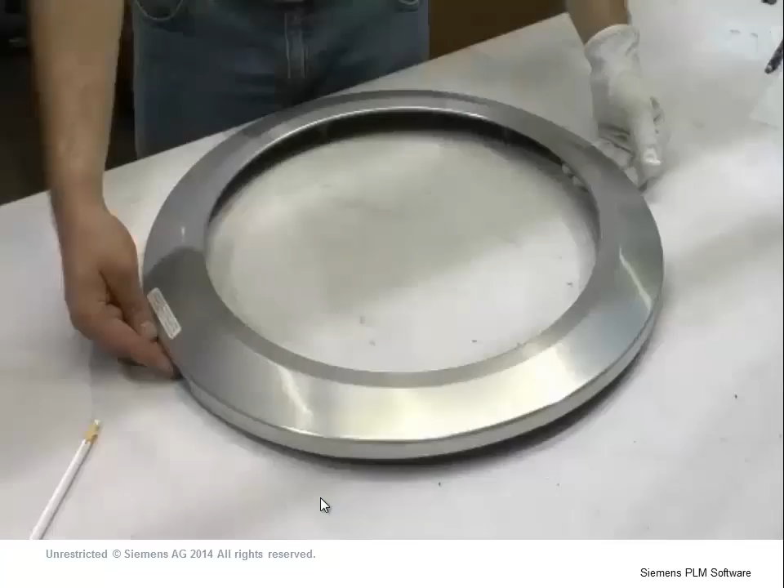If we maintain accuracy both from product design, tool design, programming, through the building of the tool, we're going to ensure that we maintain a level of accuracy that gives us a high quality part.

Time and cost somewhat equate. If you can't beat them on labor cost, then you've got to find a way to beat them in some other way. And that's where we excel and have always excelled, is that not only do we do things in a hurry, but we do it on time.